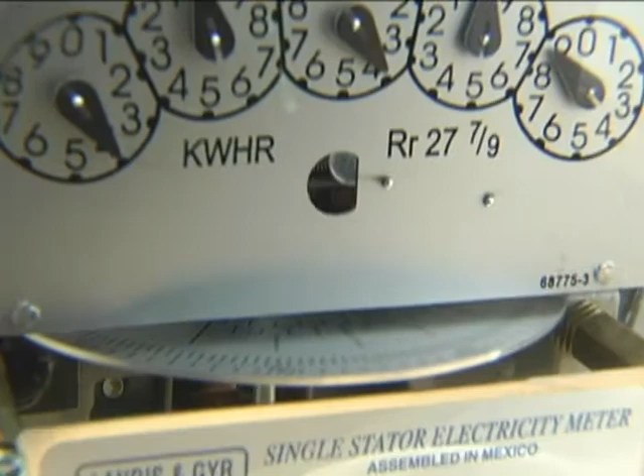Energy costs are trending higher every year with no signs of stopping anytime soon. Your personal energy usage could probably use a little cutting back, but don't be so quick to beat yourself up over it. The fact is, buildings are the biggest energy hogs, consuming 72% of all electricity. Although most new buildings incorporate some form of energy-efficient solutions, the opportunity for retrofitting existing buildings is massive.

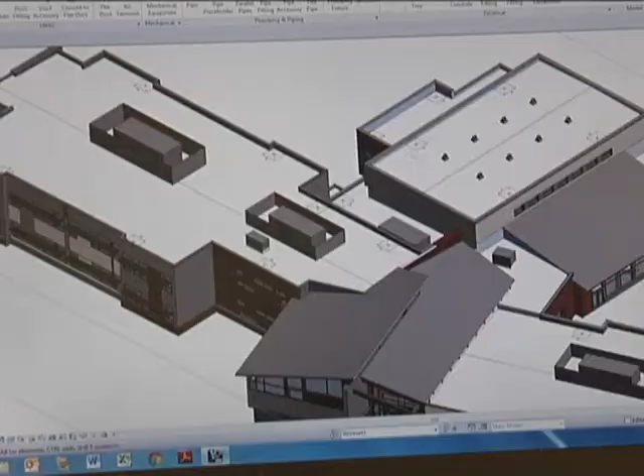When you sit down to review the total ownership costs of a building ready to be constructed or renovated, you need to look past just the initial financial cost into a true life cycle cost that includes owning and operating costs over the life of the building. Buildings with systems that are more sustainable tend to reduce the ownership and operating costs over the life of the building.

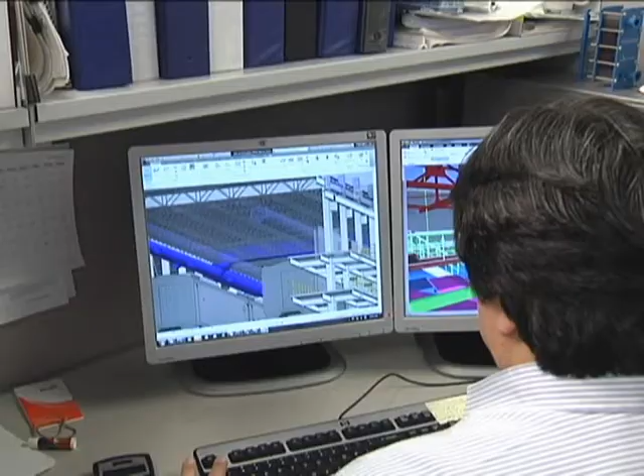Since 1959, MKK has designed and engineered mechanical, electrical, and plumbing systems for new construction, renovation, and expansion projects. The company employs over 50 production staff, nearly half of which are licensed professional engineers. MKK provides MEP design services for the built environment.

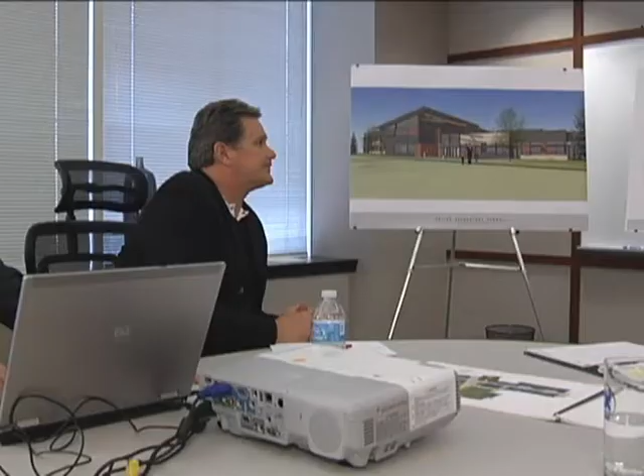And we're not just engineers. We're consultants. We're going to go out and investigate the products that are going to match up with the projects that our clients have brought to us. In that sense, we are true consultants in the industry.

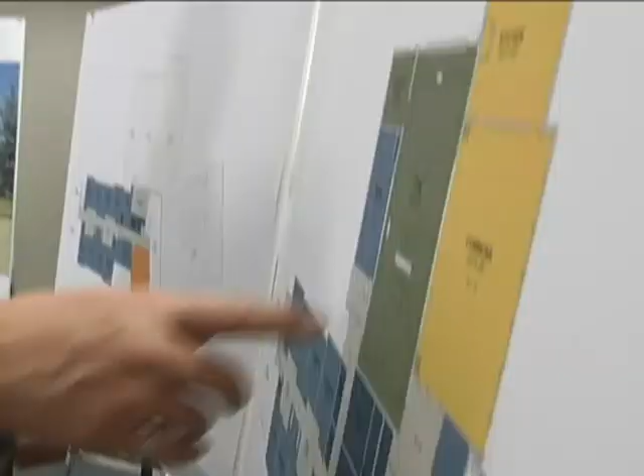MKK approaches the built environment holistically, viewing it as an integrated system. The company helps building owners understand the return on investment of sustainable systems, showing them an overall life cycle cost rather than merely a first cost.

We talk to manufacturers and vendors to understand the science behind the hype. And then we sit with our clients to help them make an informed decision based on what level of risk they're willing to take and how far they're willing to stretch their thinking. At the end, we're just consulting with them to make the best decision for their project.

In addition to engineering design, MKK provides a full range of energy services that includes commissioning, energy models, and energy audits. As a member of the United States Green Building Council and an EPA Energy Star Service provider, MKK has designed over 40 buildings that have received LEED certification.

These facilities not only save money in energy and maintenance, but can also earn more per square foot of rented space for building owners. If you look at this from a life cycle design philosophy, it is more economical, or as economical, to install a sustainable system than standard systems.

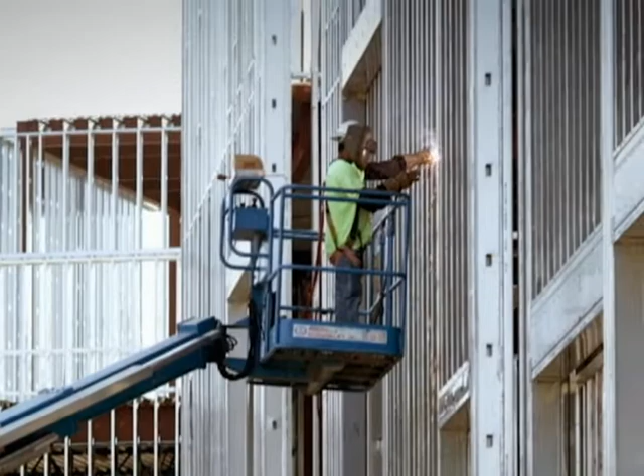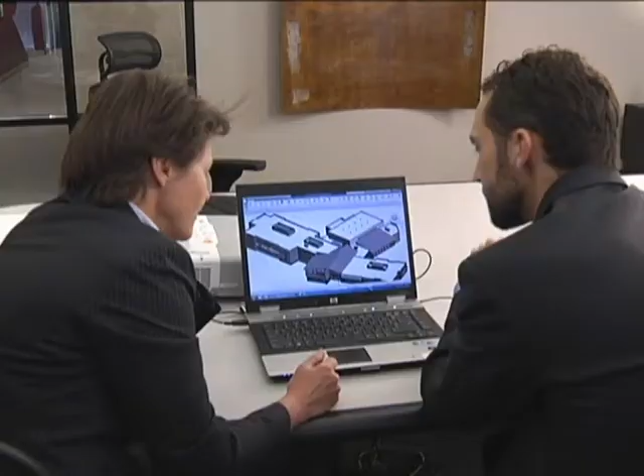A small investment made at the front end of the job can lead to lower maintenance, energy, and equipment replacement costs over the life of the building. In addition to specializing in the design and engineering of new buildings, MKK also offers expertise in improving existing buildings.

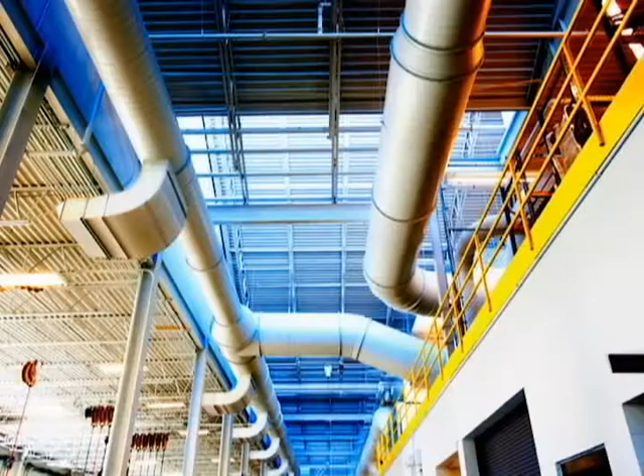The firm recommends first diagnosing the building through an energy audit before proceeding with retro-commissioning, a process of verifying that all building systems are operating at maximum efficiency. Depending on the results, building owners can make improvements such as replacing light fixtures, upgrading mechanical systems and internal equipment, or retrofitting windows and roof insulation.

Energy management software can be implemented to monitor how the building reacts to weather and the elements. You can retro-commission the building to ensure it's operating at peak efficiency for the systems already installed. Furthermore, you can enhance the controls to basically make it self-commissioning.

At which point the owner can look at the building from afar and understand if it's getting off track, and send service technicians out to diagnose and fix the problems.

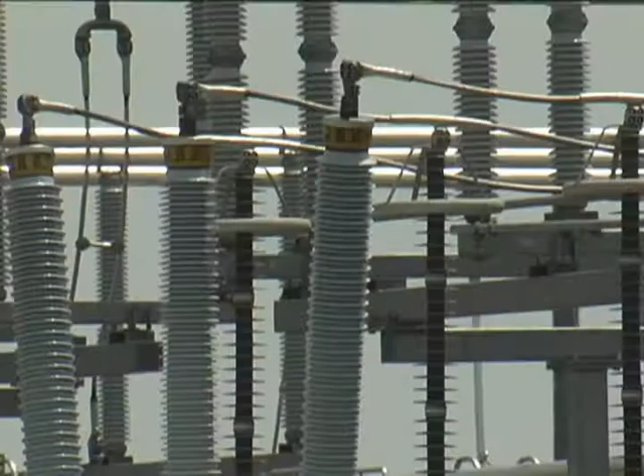Once we've tackled the issue of bringing the energy use of buildings down to net zero, MKK says the next step will be figuring out how to put energy back into the grid. In the grand scheme of things, this goes beyond the built environment. Rather, it's about making the entire grid more efficient.

MKK, in concert with our clients and the occupants of the buildings, will help not only save energy, but also save vital resources that we all hold dear to this planet that we occupy.